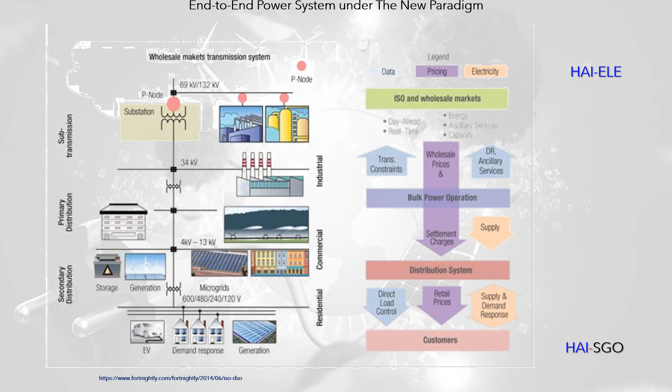HAI-GAS, natural gas supply chain optimization, models designed to support the decisions of the agents involved in the natural gas supply chain. HAI-ELE and HAI-SGO cover all levels of the electricity systems. Electricity system and wholesale market optimization models.

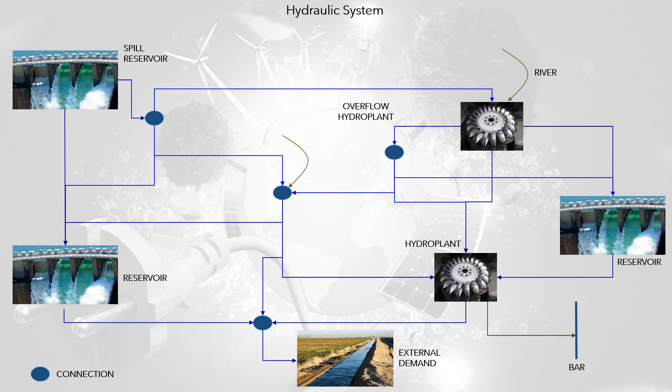Physical modeling, hydro system. High Water corresponds to a general model that includes all kinds of hydraulic components: reservoirs, hydroelectric power plants, pumping stations, pumping storage, rivers, overflow channels, connection points, demands, irrigation, aqueducts, environmental, industrial. Components can be freely linked to form any topology.

Hydroelectric power plants are modeled independently of reservoirs, so plant-reservoir and reservoir-plant connectivity must be established. The regulation capacity of the reservoir is simulated in detail, so such a simulation consistently represents the dispatch of the power plants, considering their ability to regulate the multi-annual, annual, hourly water resource.

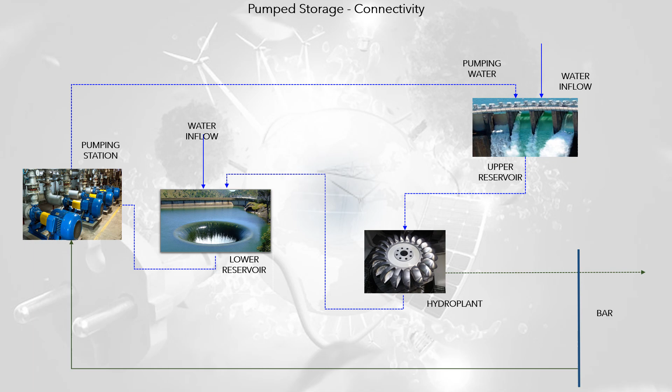For special reservoirs, it is possible to generate established operating rules based on agreements or laws that must be observed when using water resources.

Physical modeling, electric system. Electrical connectivity is carried out through a network of circuits, links, and bars, nodes, that integrates different types of installations: power plants, hydroelectric, thermoelectric, coal, wind, solar, biomass, places of demand, industrial, cities, regional interconnections and energy storage.

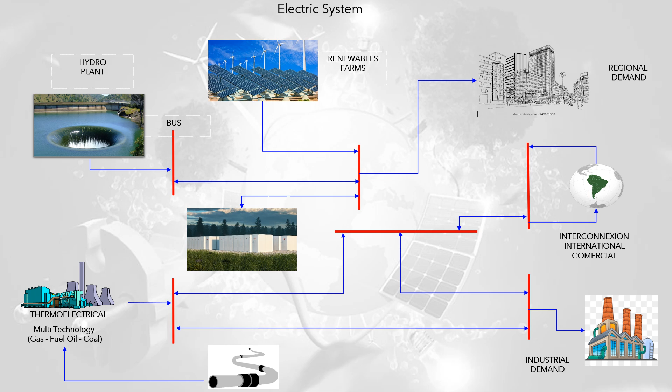For each type of electrical infrastructure, High Power includes the exact equations for simulation. High Power includes the simulation of several types of renewable energy sources and energy storages.

Physical modeling, natural gas system. HAI-GAS describes the process of supply and demand of natural gas. From this point of view, its integration with the electricity system determines the economic balance electricity-gas. The entities of the natural gas system are nodes, which connect the gas system installations. Production fields. Consumption zones, discriminated by sector, for example, refineries, heavy industries, residential, vehicular, and commercial.

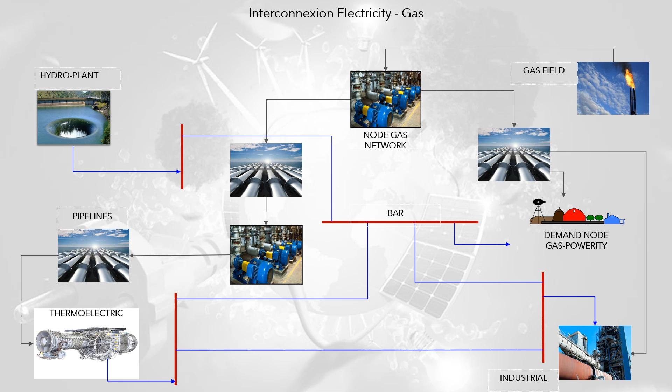Thermoelectric power plants. Transport systems, pipelines and multimodal transport systems using vehicles. Pumping stations, which compress the gas to transport it, and ports, which receive and/or ship liquefied natural gas, LNG. They are associated with liquefaction and/or regasification plants and have gas storage capacity. Connectivity between the electricity and gas sectors occurs through the demand for natural gas for use in thermal plants, and the substitution of the demand that can occur between gas and electricity.

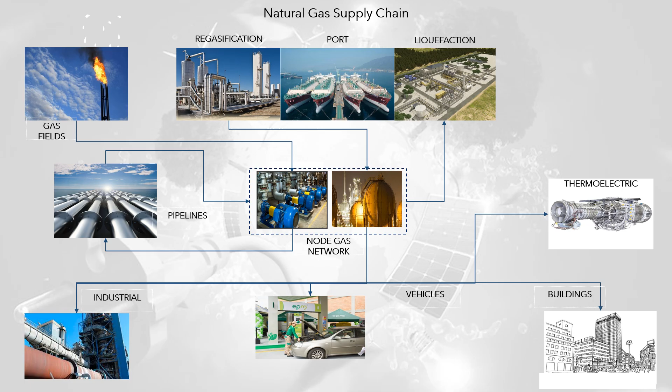HAI-ELE mathematical models make up a flexible decision support system that provides different types of services in an integral way. They can be classified into integrated dispatch of generation plants, optimization of generating agents, and predictive analytics of stochastic processes.

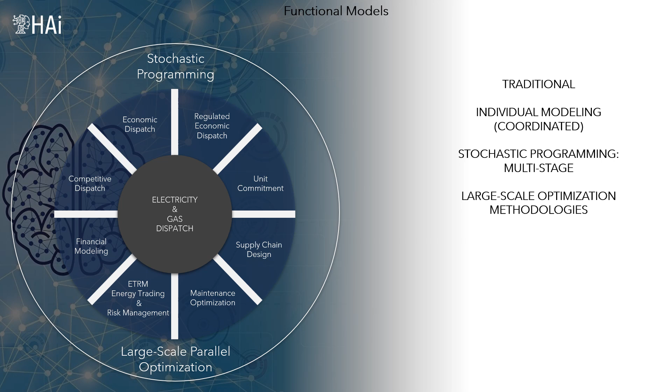Traditionally, the optimization models in the electricity sector have been individual modeling with exogenous coordination between models, based on multi-stage stochastic programming, and using large-scale optimization methodologies. The differences provided by High Power are integrated holistic modeling, scientific risk modeling, multidimensional uncertainty, parallel optimization, and autonomous real-time distributed optimization.

The EED, Electricity Economic Dispatch, model optimizes the dispatch of generation infrastructure, minimizing the cost of operating the electricity system, which simulates a perfect electricity market.

EED is the core model of High Power, as its equations/constraints are used in multiple specific models that the agent requires to address decision support needs. From EED, models of complementary dispatch are built: Economic Perfect Dispatch, Economic Regulated Dispatch, Nash-Cournot Equilibrium Dispatch, and Unit Commitment. The first 3 models are oriented to planning and the fourth to real-time programming.

3 types of connectivity of the generation system and the transmission power grid are considered: ideal single node, ideal dispatch ignoring the transmission system; electric transmission network connectivity, based on the detailed connectivity of the electricity transmission system using bars and circuits; operative areas connectivity, when the user does not have, or does not want to use, the detailed configuration of the electricity transmission grid.

It is possible to use the connectivity based on operational areas, including limits on the transfers between areas. Interconnection electricity-gas integrates the electricity network with the natural gas network. Interconnection electricity-water can be fully detailed, including travel times between nodes and transport restrictions in water resource conduction channels.

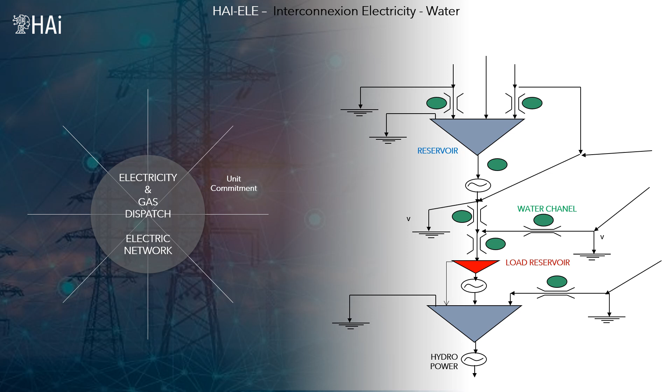Economic regulated dispatch: dispatch of plants that minimizes the cost of operation of the interconnected system and includes representative aspects of the regulation of the electricity market being simulated. It does not correspond to a model of economic equilibrium; however, it is an easy and fast way to represent regulatory considerations based on optimization models.

Cournot-Nash equilibrium: dispatch of plants oriented to the simulation of competitive electricity markets with agents that can influence, with their decisions, the transactions occurring in the market. It can be used to, among others, project the dispatch of a competitive market, and study the exercise of dominant power of agents.

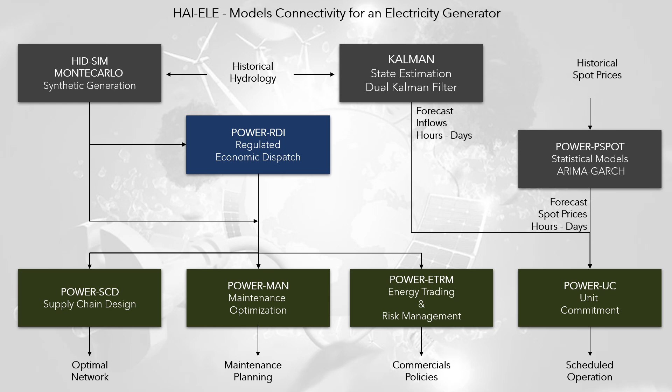The diagram presents the design of the integrated use of mathematical models to support the decision-making of a generating agent. 4 models are considered fundamental to support the strategic, tactical and operational decisions of the agent. Electricity dispatch and financial analysis: integration of dispatch models with ALM, assets liabilities management, financial models, including risk management, to perform analysis of the financial impact of decisions.

The main applications of High Power ALM are the valuation of income and expenses of investment projects, energy installations, and valuation of companies. Integrated optimization of investments by global energy companies, taking as a reference the regulatory laws of the different regions or countries. The financial modeling results individualize the operating income and expenses, and can include all types of legal accounts.

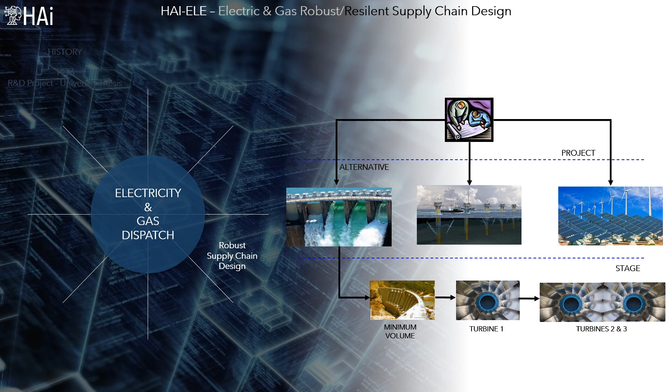Electricity supply chain design and risk management, associated with strategic planning: long-term decisions related to supply chain design, in relation to capacity of reservoirs, transfers, power plants and other assets of an electrical system. It includes risk management and financial planning.

Energy trading and risk management: optimal decisions related to energy trading and coverage of financial risks based on standardized or bilateral contracts. It corresponds to a set of mathematical models aimed at supporting the decisions of the different agents involved in energy trading in 1. long-term market, 2. spot market, and 3. secondary markets.

The result of a risk analysis is the definition of Pareto curves of financial risk versus expected revenues/costs, based on which the decision maker must define the risk position he wishes to assume, varying between risk-prone and risk-averse.

Maintenance optimization is oriented to policy making for preventive maintenance of multiple central generation plants and other electrical assets. It can be applied to all assets in a regional or national grid. High Power Man can be implemented following the principles of PHM, Prognostics Health Management, for industrial asset maintenance, integrating specific models of predictive analytics for asset components and prescriptive analytics to optimize the integrated operation of the asset network.

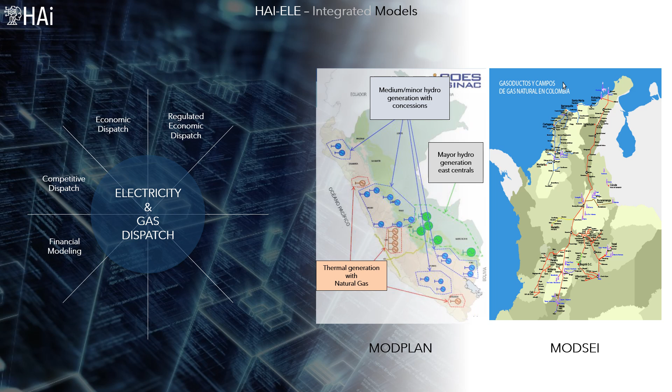High Power has been used by the ISO in Peru, and market supervisors in Colombia, for planning and decision-making purposes. High Power includes some predictive analytics models. Spot price modeling in a free market: the prediction of spot prices of the energy market is fundamental for the decisions made by an agent that participates in that market, whether buyer or seller, generator, trader, or distributor of energy.

This is because the decision maker requires that models that produce spot prices be used in other mathematical models within the decision-making process. The mathematical models to be used depend on the planning period, real-time/short/medium/long-term, and the type of market, considering the dispatch of the plants by mathematical model, or by offers of market agents, free market.

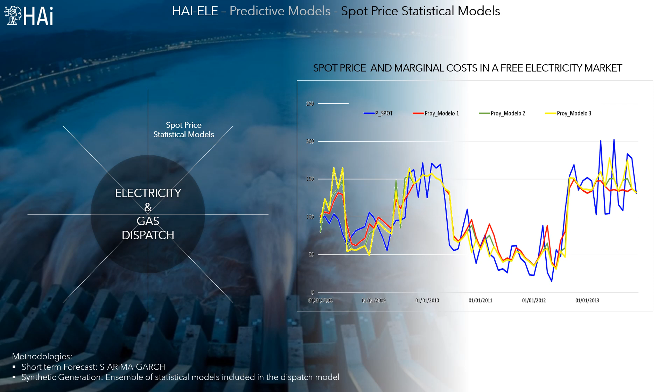In the case of a free market, the situation is complex since the law of price formation cannot always be explained based on mathematical rules, explicit, clear and universal, that already integrates a mathematical model of dispatch.

Synthetic generation of renewable energy sources. For the generation of synthetic scenarios of climate variables, there are two requirements: short-term, hours, days, and medium/long-term, weeks, months. Specific short-term models must be built for each renewable source. For the medium and long-term, there are three alternatives to generate synthetic scenarios.

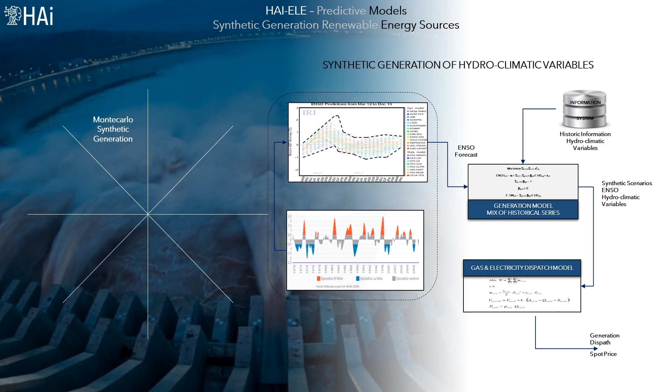Synthetic statistical model for the generation of climatic variables, Fiering-Matalas type. Generate synthetic series of climatic variables based on the mixture of historical series. Generate synthetic series based on the historical series having the ENSO series, El Niño Southern Oscillation, as an instrumental variable. Projected short-term hydrological contributions using variations and enhancements of Kalman filter.

All HAI-ELE models share the same data model, input and output, in such a way that communication between models is direct. In the same way, all models make up the artificial hypothalamus of the wholesale market of the electricity sector. Smart grids optimization models.

In a regulated environment, generation, transmission, and distribution are operated by a vertically integrated enterprise, usually a state-owned enterprise, which has a monopoly on the supply of electricity. Conversely, in a deregulated environment, different parts of the electricity grid are owned and operated by different actors, and electricity markets provide a platform that fosters competition among participants.

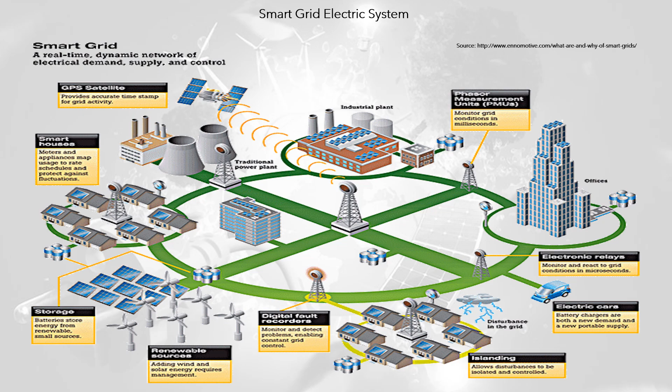As each smart grid is particular, it requires a specific decision support system that allows the operator to interact with the entire electrical system. HiSGO provides all the analytical elements necessary to configure the specific DSS that each case requires. HiSGO is composed of forecasting models and optimization models aimed at supporting the decision-making of electric agents, smart grids, optimization of the economic and technical aspects related to smart grids and electricity companies.

Demand response for buildings and/or housing, demand response, optimization of energy management in facilities, such as universities, shopping centers, office buildings, homes, urbanizations, and small towns. Industrial energy efficiency, optimization of energy management in heavy industries intensive in energy consumption.

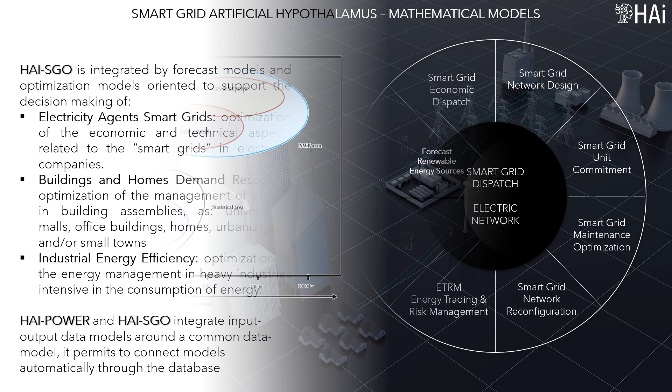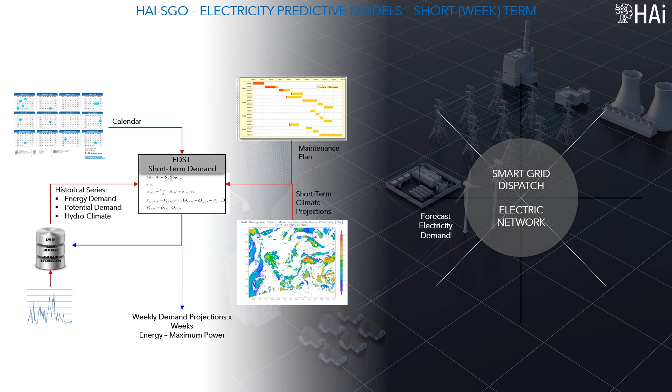Forecast renewable energy sources. They correspond to predictive analytics models focused on the prediction in the specific sites where the generation plants are located. Forecast of energy demand. Long run: demand projections per weeks, energy and maximum power. Medium term: demand projections per weeks, located in medium areas. Short term: demand projections per days or hours, located in specific installations. Real time: demand projections per fractions of hours, located in specific installations.

HAI-SGO is integrated by the following optimization models: economic/regulated dispatch of the smart grid, optimization of the management of electrical energy in small cities, factories, universities, shopping centers, office buildings, urbanizations. Smart grid unit commitment, optimization of the short-term electrical load in real time.

Smart grid reconfiguration, optimizing the network topology. It considers voltage control, configuration of feeders, location/activation of electrical assets, transformers, capacitors, and phase balancing. Smart grid design, optimization of the design and/or redesign of smart grids with modern power technologies. ETRM, electricity trading and risk management, decisions to buy and/or sell electricity, in a long, medium, short-term market, one day in advance and the day of dispatch.

Industrial energy efficiency. The technical economic viability of energy storage coupled with the proliferation of energy technologies based on renewable energy sources has changed the landscape of the industrial sector, since it is now possible, and increasingly efficient, to generate renewable energy and store it for use in due time. This implies the tendency to standardize the marginal costs of generation around an average value for all periods and all the nodes of the electricity grid, capturing the benefits that this entails.

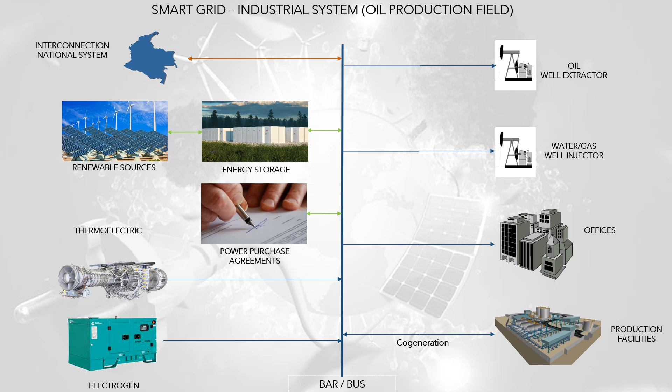In practice, all industrial companies can be agents that interact in the electricity market, since it is possible for all to act as co-generators and carry out commercial activities and transactions. This, together with the Industrial Internet of Things, increases the pathways to achieve industrial energy efficiency.

Industrial energy efficiency results from the integration of production processes, transformation of matter, with industrial energy services, energy transformation, aimed at the simultaneous optimization of both industrial production and energy conversion that is related to polluting emissions of gases and liquids, associated with increasingly demanding environmental control laws.

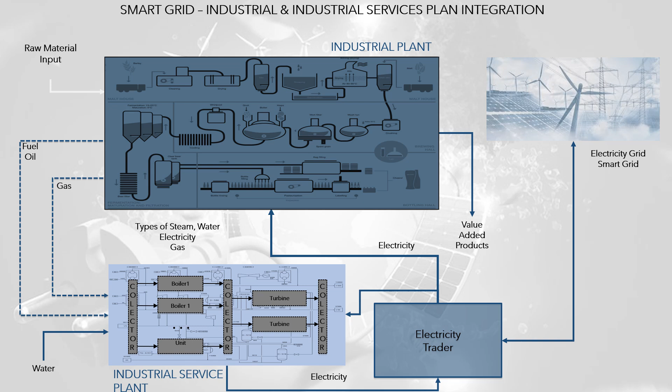The HAI-POWER and HAI-SGO models can be integrated with complex industrial process models, in which it is necessary to redesign the power supply system according to the new power technologies. This type of model includes the simulation of polluting processes, for example, combustion in furnaces, to determine the optimal mixture of fuels in accordance with environmental regulations.

HAI-POWER and HAI-SGO integrate the models and information systems around a common data model, allowing models to be connected automatically through the database or through RAM memory, integrating them as an artificial hypothalamus for an electricity company of wide coverage.

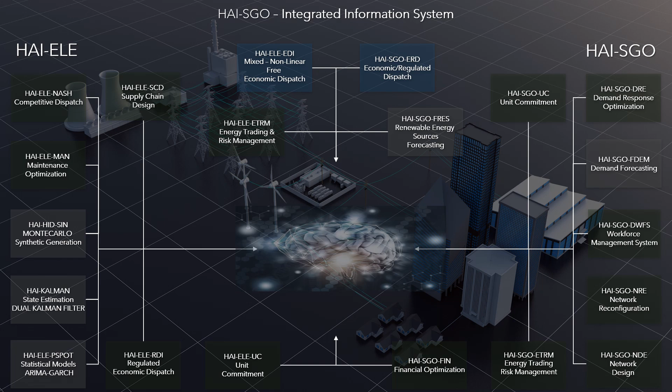Optimization under uncertainty and risk management. Optimization under uncertainty is integrated by: first, robust optimization, when the parameters of the model are characterized based on variation ranges, and the objective of the model is to produce the best solution considering the worst situation for the occurrence of the parameters. Second, stochastic optimization, when model parameters are characterized probabilistically and therefore all results can be associated with empirical probability distribution functions that depend on the risk management policy.

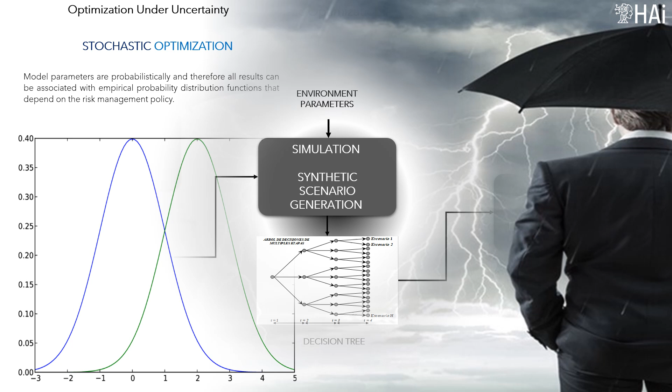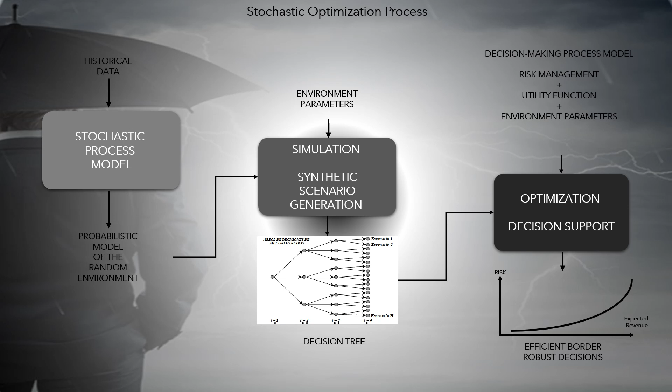The stochastic optimization process is composed of 3 stages: identification of the stochastic process model, implementation of a synthetic scenario generator, and design and implementation of a stochastic optimization model for decision support. Stochastic optimization implies the definition of the decision-making process, definition of the uncertainty dimensions and the stochastic processes associated with parameters, the risk management policy, and the approach to use for the computational solution.

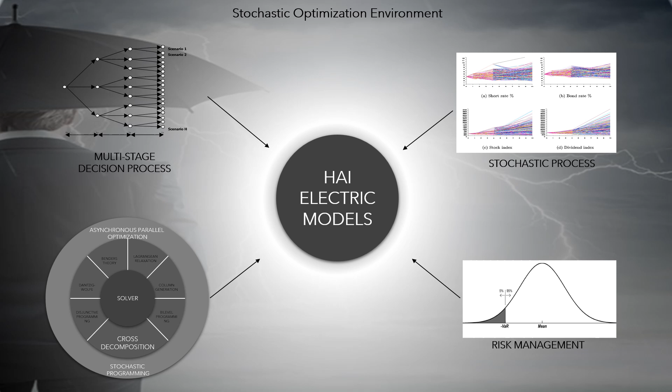There are multiple decision criteria, objective functions, that can be integrated into models which are associated with the risk management policy and risk position, prone or averse, of the decision maker. Scientific, financial and operational risk management is the true benefit provided by stochastic optimization models. The complexity of this problem lies in its bi-criterion nature: maximizing the expected revenue and minimizing the risk assumed in decisions under uncertainty. This is summarized in the Pareto curve: risk versus expected revenue, which is the final information produced by mathematical models to support decision-making.

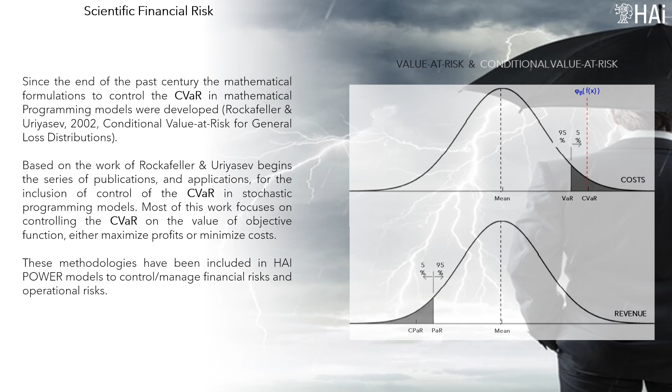Since the end of the past century, the mathematical formulations to control the CVaR in mathematical programming models were developed. Rockafellar and Uryasev, 2002, Conditional Value at Risk for General Loss Distributions. These methodologies, for the scientific financial risk management, have been included in HAI POWER models to control/manage financial risks and operational risks. The third foundation of mathematical modeling in HAI POWER is large-scale optimization methodologies.

In the future, the real-life problem solution based on mathematical programming, applied to large physical and social structures/organizations, must be based on multi-level parallelism using the modern computational architectures. Then, large-scale optimization methodologies are the way to atomize an optimization mathematical problem in multiple types of subproblems that can be solved using the concepts of asynchronous parallel optimization and real-time distributed optimization.

HAI POWER may use methodologies like Benders theory, Lagrangian relaxation, Dantzig-Wolfe decomposition, column generation, disjunctive programming and its variations. These methodologies may be combined using cross-decomposition concepts to implement parallel and/or distributed optimization. To speed up the solution time of large-scale problems, HAI created the algorithm GDDP, Generalized Dual Dynamic Programming. GDDP is oriented to solve dynamic optimization problems, integrating the Benders theory and dynamic programming approaches.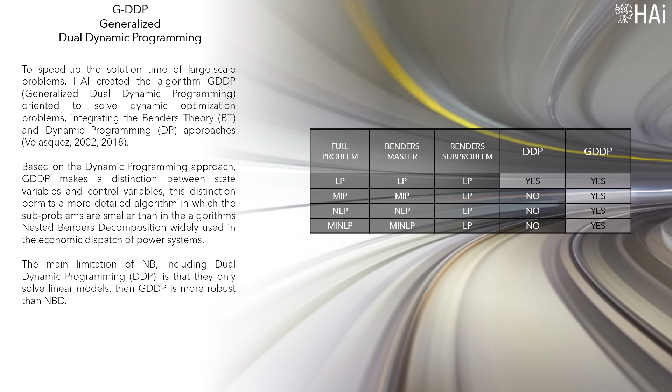Based on the dynamic programming approach, GDDP makes a distinction between state variables and control variables. This distinction permits a more detailed algorithm in which the subproblems are smaller than in the nested Benders decomposition algorithm, NBD, widely used in the economic dispatch of power systems. The main limitation of NBD, including dual dynamic programming, DDP, is that they only solve linear models, so GDDP is more robust than NBD, as you see in the table.

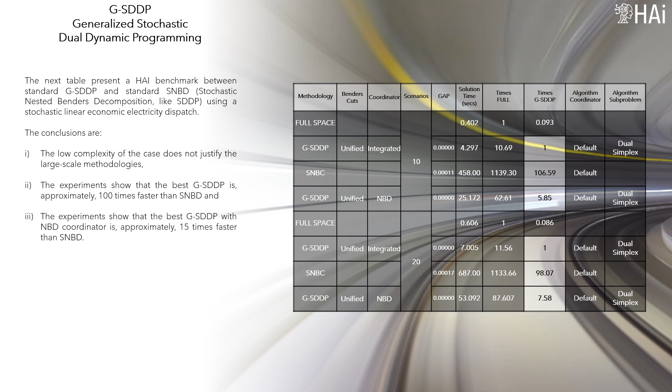The table presents a benchmark, realized by HAi, between standard GSDDP and standard SNBD, stochastic nested Benders decomposition, like SDDP, using a stochastic linear economic electricity dispatch. The experiments show that the low complexity of the case does not always justify the large-scale methodologies. The best GSDDP option is approximately 100 times faster than SNBD, and the best GSDDP with NBD coordinator is approximately 15 times faster than SNBD.

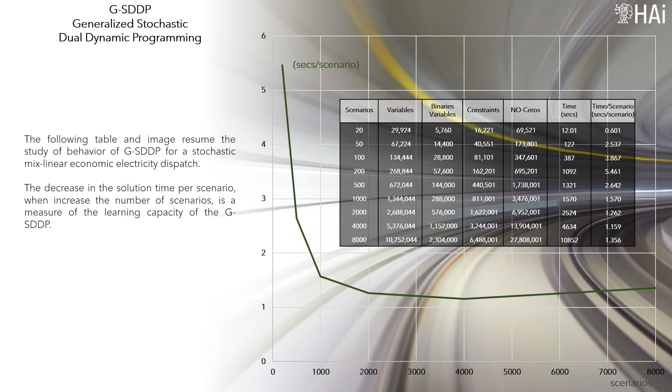The following table and image summarize the study of behavior of GSDDP for a stochastic mixed linear economic electricity dispatch. The decrease in the solution time per scenario, when the number of scenarios increases, is a measure of the learning capacity of the GSDDP. The new way of mathematics is directly related to parallel thinking, and today it can be said that, like paper-based math, sequential mathematics for single-processor computers will in the short term be a dead language. As in the human brain, in the future only parallel mathematical thinking will be practical. The new analytics is autonomous, parallel, and distributed.